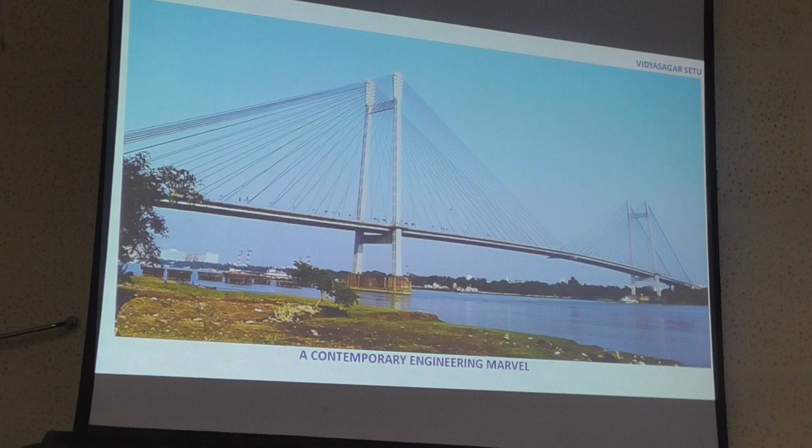Today we look at this bridge. It's a work of art. It looks like a stringed instrument ready for people to come from heaven and play music. And every time we look at this structure, anybody who had been involved with this bridge will always feel very happy and very, very passionate about it.

Now, coming to a little history, I find many of the people here, there is a mixture of young and old, and I am sure those who are my generation or after will love to remember how this project came up, what was the development, why it took so much time, and how did this develop.

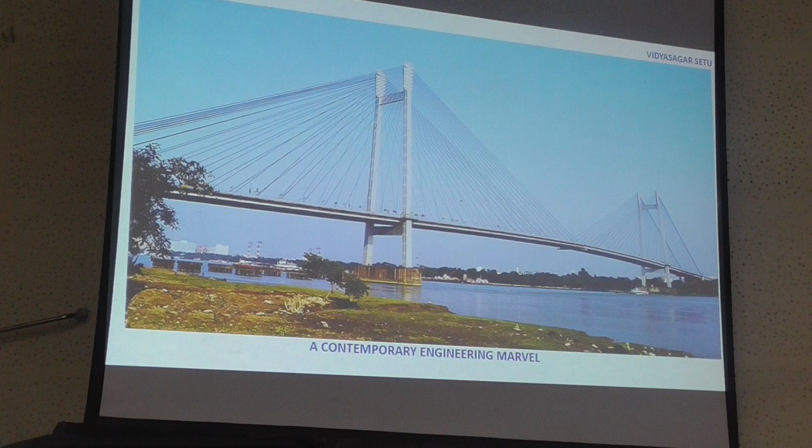You see, Calcutta is a gift of River Hooghly. Kolkata would never have come if River Hooghly was not there. River Hooghly had been the preferred trading route for entire Europe. The ladies of Europe used to long for Bengal textile, and almost all European countries had sent their vessels to Bengal for not only taking sarees but textile and many other objects.

It was a passage navigable for those ships of those days which required less draft. It was navigable right up to Triveni, and most of the European countries sent their ships up to Triveni, and that area used to be the trading point. All the suppliers would come there, and that is why, when this Jubilee Bridge was constructed, it had been kept with a lot of clearance so that ships could move up to there.

But the British were always different. They decided to make the port or make their trading hub. It was not a port, it was just a trading hub.

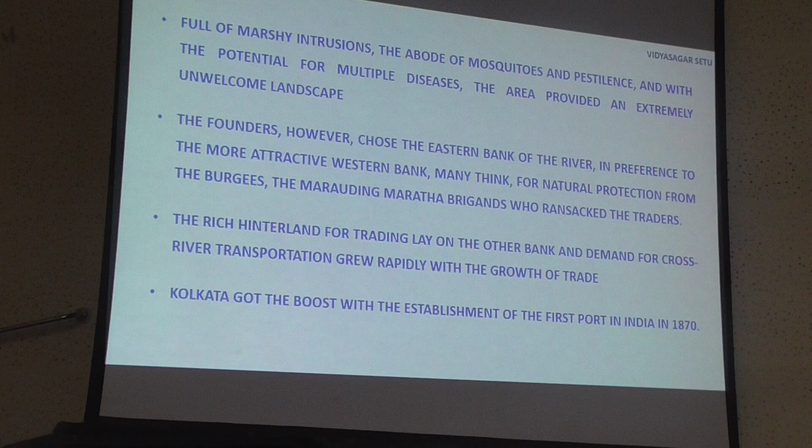You know, they made their trading hub in Calcutta, near Kolkata. They had the foresight that ships are becoming heavier and the draft would not be there. So they decided to locate there, though the area was marshy, full of mosquitoes and pestilence. It was a difficult area to live and one of the most challenging places to make a new settlement.

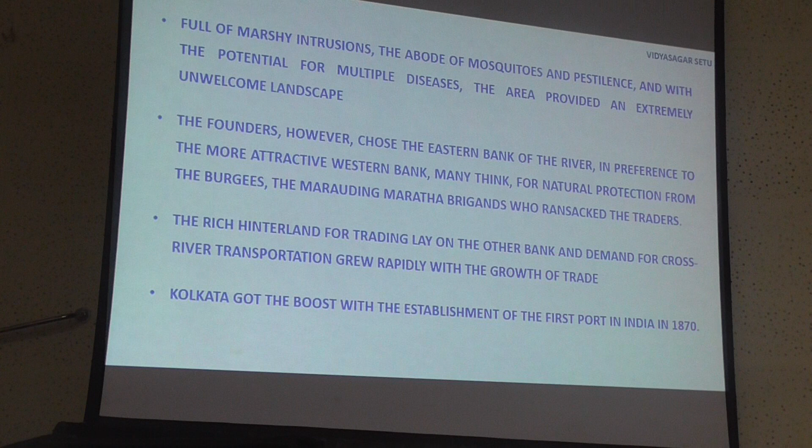It had always been a query amongst people why the British chose the eastern side of the river instead of the western side, which was much more approachable, easily communicable, at higher altitude, and drainage was never a problem. They chose the eastern side, many suspect, because they were scared of the Burgees. The Marathas used to come all the way.

You know, we had all heard the verse, Borgi Elo Deshe. And the British also made the Maratha ditch on the north to protect the city from Burgees. So it could be that, or it could be some other thinking, but the founders decided to make this the trading hub. Initially ships used to come and exchange their trading materials.

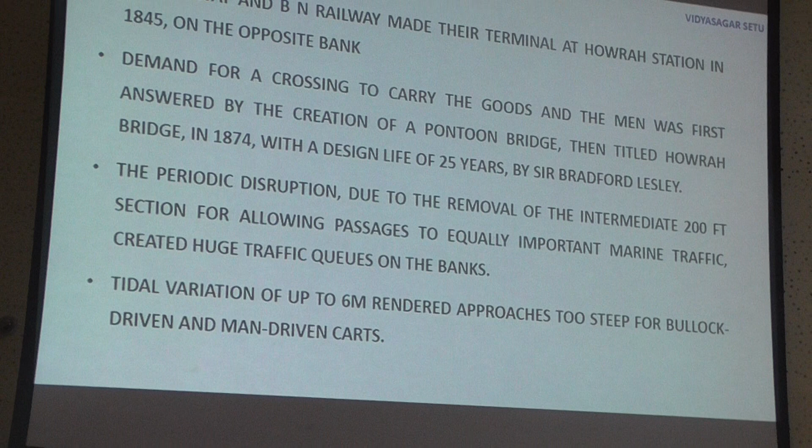Now, Calcutta incidentally had become the first port in the country. It was in 1870 that the port was formed in Calcutta. The port trust law was passed for setting up a port at Calcutta. The two railways, East Bengal Railway and Bengal Nagpur Railway, made their terminal at Howrah Station in 1845. Now, that is on the other bank. The port is on this bank, on the Calcutta bank.

Automatically, all the cargo and the men who used to come for this port had to cross the river. And the demand for a regular crossing became very loud. The first solution came in the form of a pontoon bridge. An illustrious engineer, Sir Bradford Lesley, who was also responsible for the development of Sir R.N. Mukherjee as an engineer, was given the charge, and he was also responsible for the Jubilee Bridge near Bandel, Naihati.

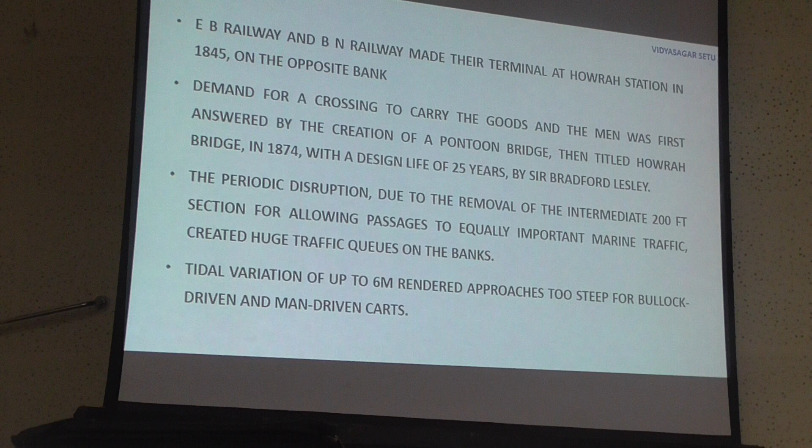After that, he was given the charge of this pontoon bridge, and he was very fond of pontoon bridges per se. This is a bridge which was designed and constructed by him in 1874 with a design life of 25 years, expecting that by 1899 there would be another bridge coming up. That pontoon bridge unfortunately had to continue till 1943. So the pontoon bridge had a life of 70 years, even though it was thought that it would be there for only 25 years.

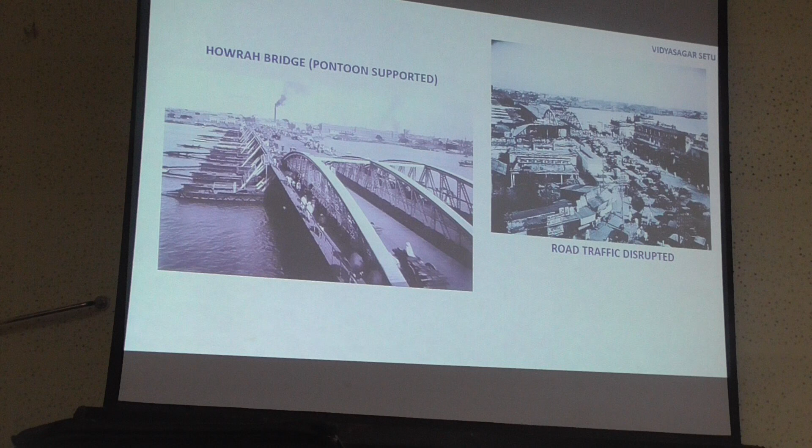So demand for a permanent land crossing grew. It was understood that it is not possible to have an interim crossing. It affects both the road vehicles and the river crafts. Both are affected, and the answer came quite late in 1943 as the new Howrah Bridge. Incidentally, the pontoon bridge was known as the Howrah Bridge. So when this new bridge was constructed, the act was passed as the New Howrah Bridge Act, and this was known as the New Howrah Bridge.

Now this was again an outstanding structure in those days, with a span of 1500 feet or 450 meters. It was unusually long for those days, and therefore a very considerable time was taken in formulating the bridge arrangement and the design, and it was a bridge which required 26,500 tons of steel. Very proudly, Tata's supplied 23,000 tons of this as a matter of national pride.

And this was the first use of high tensile steel. The other steel is known as mild steel because it had a value of 250. Now this was 350. And this is the first bridge in the world which has used high tensile steel.

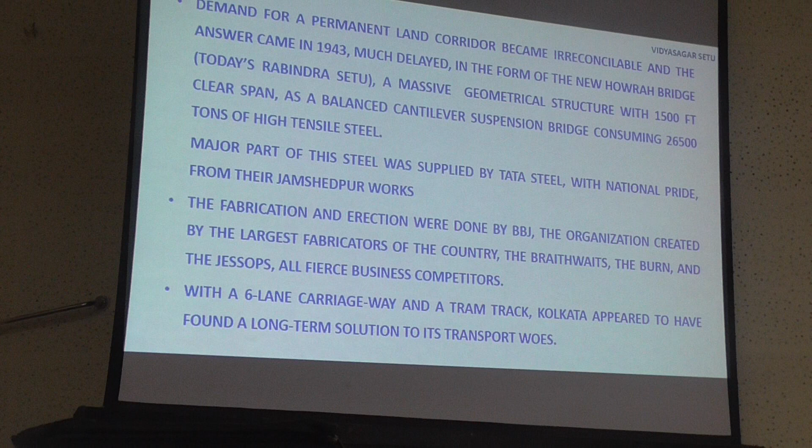The fabrication and erection were done by a local company, BBJ, though all British owned. Braithwaite's, Burn and Jessops, all three are British owned fabricators, the topmost fabricators of the country, fierce competitors. But when this bridge proposal came, they did not want to let this go without their participation. That's why they formed a consortium, a company with the name of BBJ, and they fabricated and were also given the charge of erection. Even though the original contractor remained Cleveland Bridge from England, the entire thing as part of the contract had to be subcontracted to BBJ.

So with a 6-lane carriageway and a tram track, Calcutta got a new bridge with a 100 feet wide deck, and the city fathers thought that their transport problem was solved for a very, very long time.

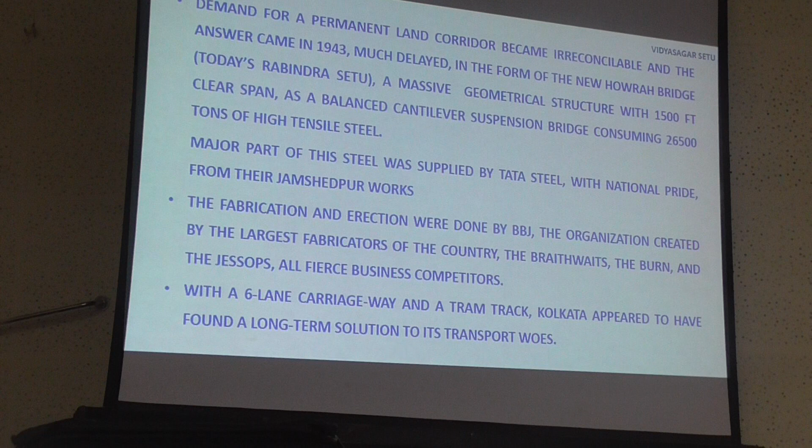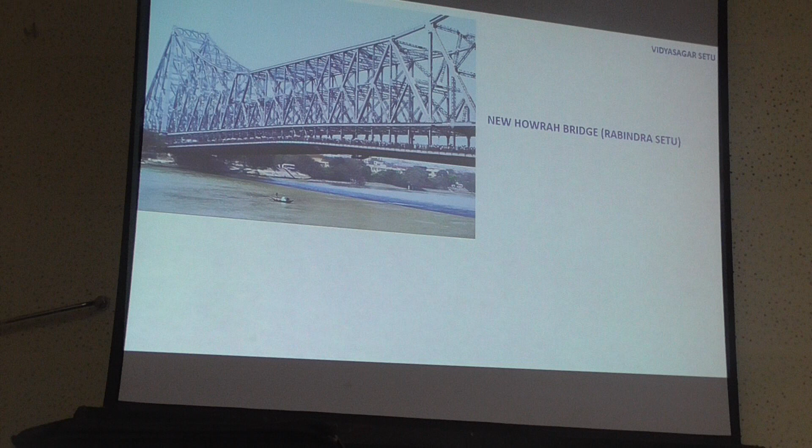Next. The new bridge was completed in February 1943. It was in fact completed in 1942, but the political climate was hostile. The British did not have the courage to inaugurate this bridge in '42 because of the movements going on, and this was delayed and inaugurated in 1943 with a single tram crossing the bridge at midnight. That is how the inauguration was done.

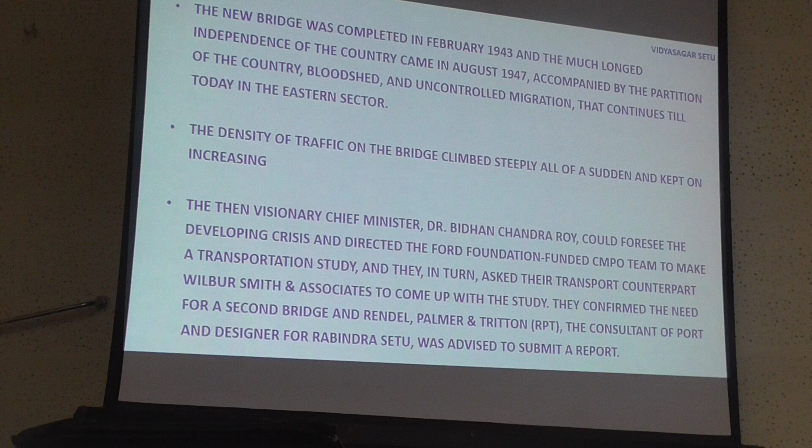But then came partition, then came our independence, much longed-for independence, but followed with bloodshed, migration, which unfortunately is still continuing today. We still have people coming from the other part, which became East Pakistan and then Bangladesh. The density of the bridge almost doubled, all of a sudden. And by 1960, it was difficult to cross that bridge without giving a lot of time. When we were in BE College, it was part of our regular travel, and it used to take some time to cross.

The then Chief Minister, the only visionary Chief Minister we had, Dr. Bidhan Chandra Roy, foresaw the problem, and he asked CMPO, which was working with Ford Foundation money, to look for an alternative crossing. CMPO contacted their transport consultant, Wilbur Smith and Associates of USA, who immediately opined that a bridge is necessary, and they entrusted Rendel Palmer and Tritton, RPT, who were permanent consultants of Calcutta Port Trust and had also been the designers of the Rabindra Setu, the so-called New Howrah Bridge. They were entrusted to make a report after site inspection, soil investigation and traffic study.

RPT submitted its report in 1962, and they immediately confirmed the urgent need of making this bridge, and they wanted another 6-lane carriageway bridge with a capacity of 85,000 vehicles per day. And the present Vidyasagar Setu has exceeded that expectation also. The number of vehicles passing is now touching 100,000. They made a detailed study and submitted their report. The first question which came is where to locate the bridge.

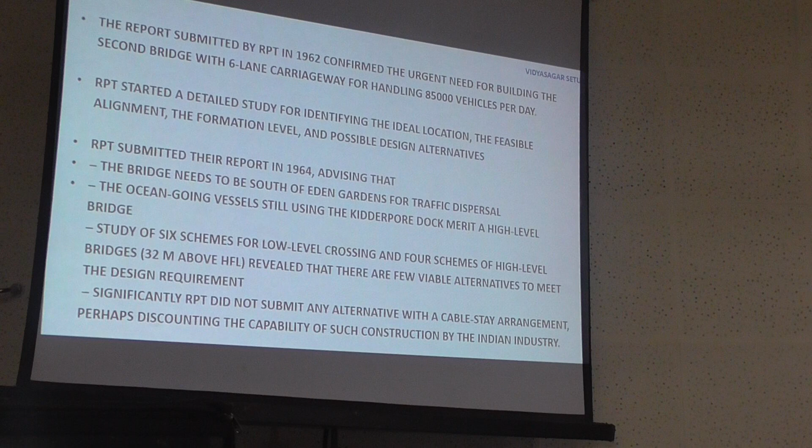Their suggestion was, or rather finding was, that it can only be done on the south of Eden Gardens, because if it is further north, then traffic cannot be dispersed. The ocean-going vessels which were still using Hooghly and using Kidderpore dock required a high-level bridge, because if the vessels pass and the bridge does not have the clearance for such vessels, it is always possible that some ship will drift and hit the bridge.

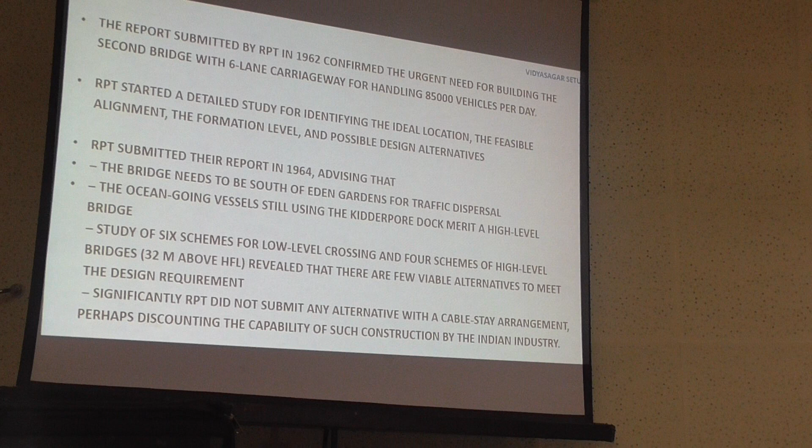All of us question, the present users of the bridge, why was it necessary to make this bridge so high and waste so much money? This was the necessity because there had been an accident in Maracaibo where a ship hit a bridge and the bridge had been dislodged, and therefore it was decided that it will be a high-level bridge. Then they submitted 6 low-level schemes and 4 high-level schemes for consideration by the authorities.

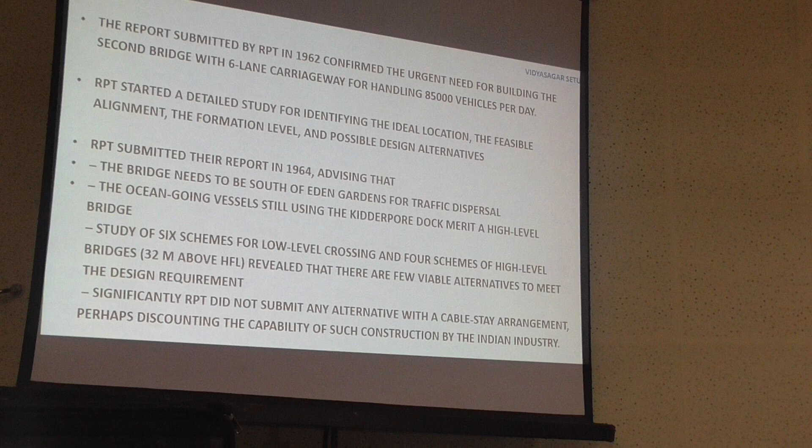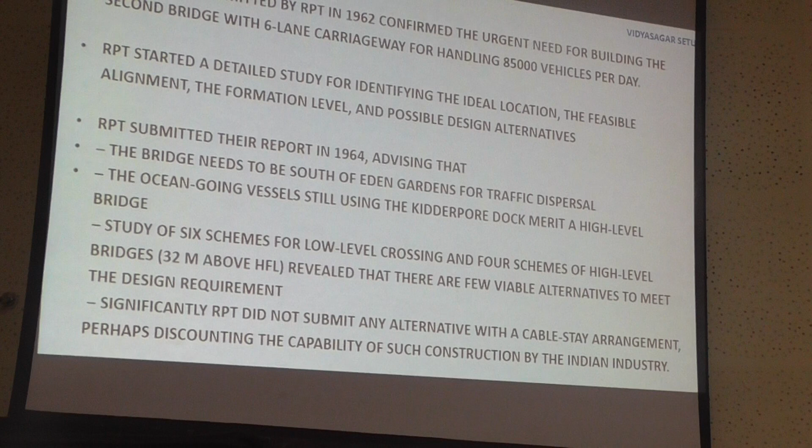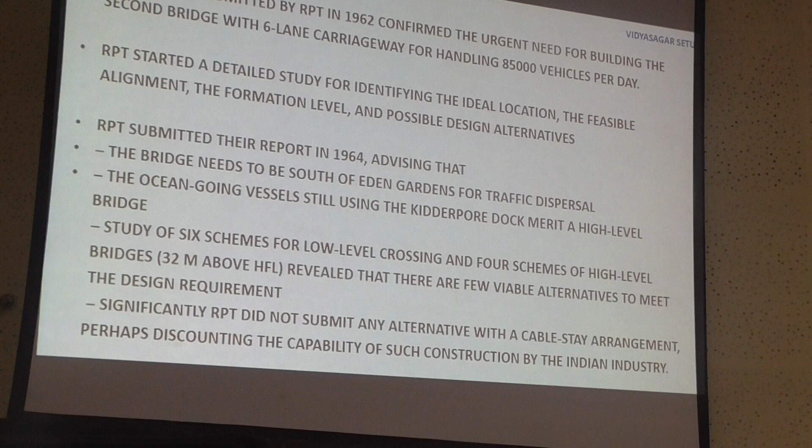Authorities were, of course, the Port Trust, because the bridge is on Hooghly and Hooghly belongs to Port Trust. That is why Port Trust was the authority all the time for the bridges on Hooghly. Now, all these alternatives of RPT were different design considerations. There were self-anchored suspension bridges also, and long span box girders. But RPT did not recommend or suggest or even consider a cable stayed bridge, which was new on the horizon of the bridge industry. Perhaps RPT thought that Indian industry would not be able to make a cable stayed bridge successfully.

So as a result, the state government at that time got serious. They initiated a hydraulic model testing of the location from CWPRS in Pune to find out whether locating the piers as they are suggesting, because they are suggesting one pier to be inside the river, and how that is going to affect the Kidderpore dock and the river, the hydrology of the river, the siltation pattern, which was always in doubt. Their report was available in 65. They cleared the location of the bridge with certain changes in docking the ships in Kidderpore and also some shapes of the piers. Now, after these studies, clearance was given to the Port Trust to go ahead with the tendering process.

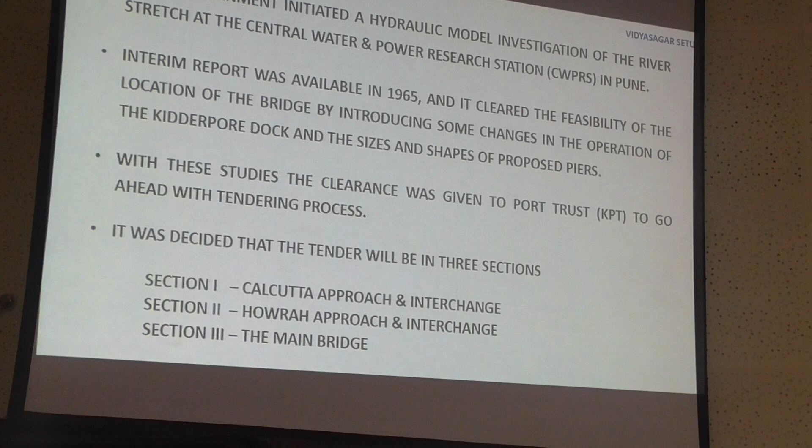It was agreed that the tender, this being a large project, will be in 3 parts. There are 2 approaches and the main bridge. It is the main bridge which was a very attractive proposition for the international construction industry at that time, because such an unusual long span bridge was not much in the horizon. The world was passing through a recession. The OPEC had unleashed a tremendous attack on the financial stability of the world, and India was of course in a very, very bad state. Indian economy was in a poor state, but the bridge could not wait, and tender was invited.

It was a global tender with provision for foreign exchange, but it was clearly mentioned that quantum of foreign exchange will be one of the major criteria for selection of the bidder. It so happened there were only 2 bids received, not only for the main bridge but also for the approaches. There was nobody from outside, and these 2 bids were from India. One was by BBCC, which is BBJ and Gammon, and the other was EPI, which was just formed for taking the Indian construction industry to the Middle East and Arab countries in a big way, and that is why all major central government agencies participated together for making this EPI.

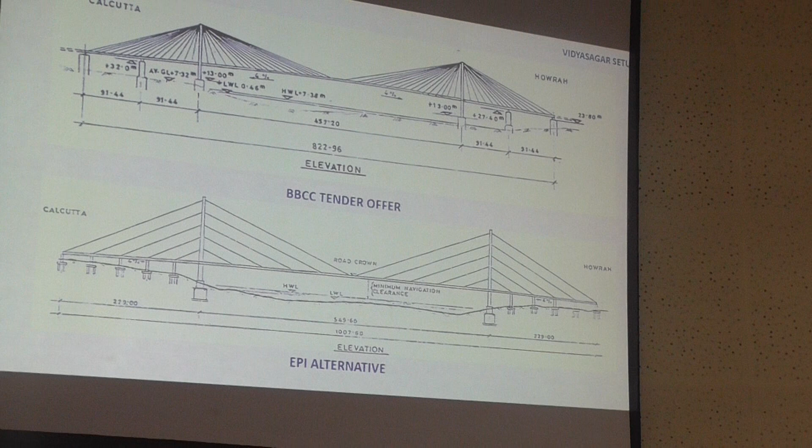So the bid which came from BBCC, you can see on the top, had a 457 meter span, as was the tender condition. It showed 1 pier in water, and of course 2 side spans of 91 meters each, and it had a fan type. Fan type means it's like an umbrella arrangement of cables. The EPI offer was also incidentally cable stayed, but they followed a 550 meter span, almost 100 meters more, and the bridge itself was almost 200 meters longer.

It was more than 1,000 meters, more than a kilometer total bridge. But it had a harp type of arrangement for cables, where the cables are all parallel. It looks like a harp.

Now both of these, as you can see, were aesthetically very attractive, and both parties were extremely keen to land this contract. BBJ, because it had very few bridges at that time, with the country's economy in a poor state, this is one bridge which could make them live. It was a live or die situation for them.

For EPI, this was a passport to enter the Middle East. If they can do a bridge of this size and importance, then automatically they will have a credential which is big enough. And it was indirectly also a fight between the state and the center, which we are so accustomed to. The central government agencies were all supporting EPI, and through them EPI was trying to get support from the central ministries as well.

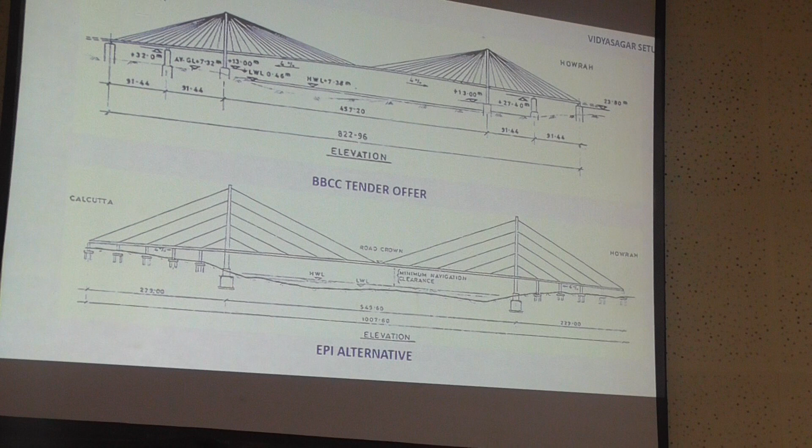And it was a fierce fight. There were technical issues as also there were political and social issues.

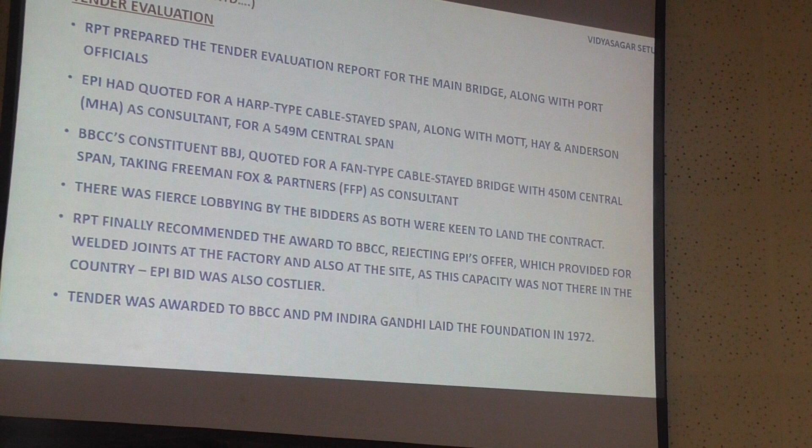RPT was given the task of evaluating the two tenders. After very close scrutiny, they came to the conclusion that the BBCC tender is a better one, in the sense it has been done with riveted construction, whereas EPI, who had Tribeni Structures as their component and Voestalpine of Austria as their partner, had suggested welded construction, welded joints. Now, welding quality level was not acceptable in the country at that time.

And there was tremendous difference between the members of the technical committee of BBCC, and that was aided by another event which I will tell you later.

But the fight came to a point where RPT's recommendation was challenged. Then it was referred to railways, because railway has more experience in steel bridges, to determine which design is acceptable. The railway chairman, railway board, appointed a committee which gave a clear direction that at this point of time, welded bridges cannot be done, and therefore riveted design is preferable, and that is how BBCC got this contract.

There was a tunnel offer. DCL was involved with that offer as a consultant, but it was an incomplete offer with no firm pricing, and therefore it was rejected. EPI's tender, incidentally, because of the longer length and all that, was costlier also. So that also helped.

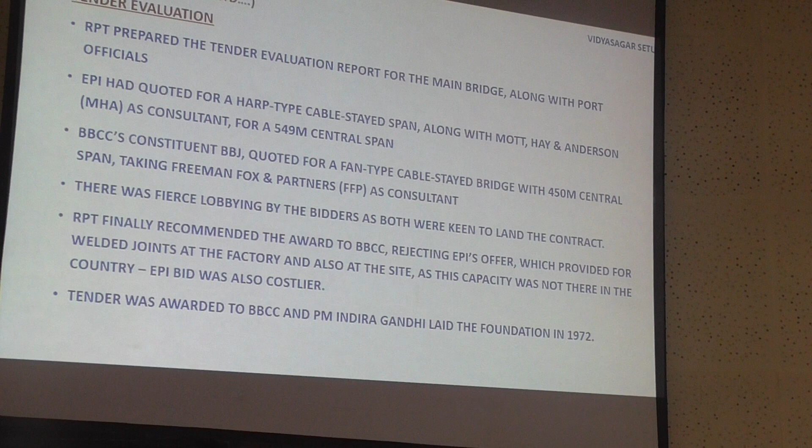Now, after the job was awarded, there were still debates going on, because all over the world, a number of long-span bridges have failed - in Europe, in Australia, in America. And these failures unfortunately got associated with cable-stayed bridges, because some of these were having a cable-stayed span also.

The failures actually happened with box girder construction. Instead of an I-girder, instead of a plate girder, at that time the box girder had come in, and everybody was trying to make the weight less, and make the plate thinner. These are all welded box girders. Now, in this process of economy, to achieve greater economy, the Lakshman Rekha was crossed, the design aspect was ignored, and one by one box girders failed.

And one of the very major disasters happened in Australia, in Melbourne. The bridge across River Yarra is still known as one of the biggest failures in the bridge industry, and a lot of people lost their lives because the bridge fell on the canteen when people were having their lunch.

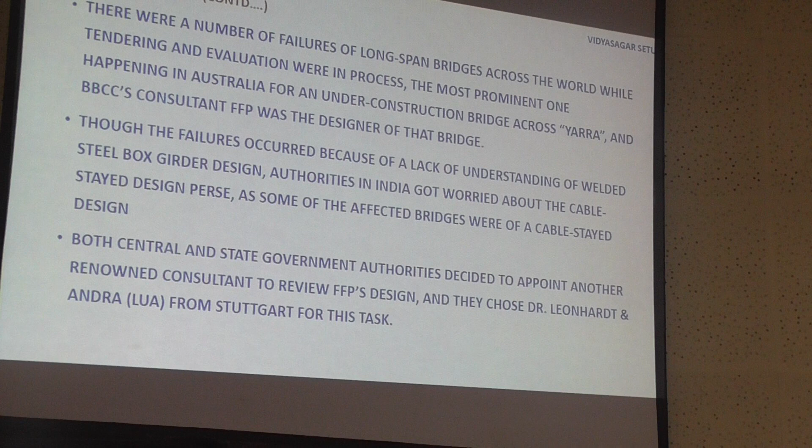It so happened, Freeman Fox and Partners was the designer of this bridge. So the opposition was very vigorous, saying how can we leave this bridge of ours in the hands of people whose bridge has failed. So after a lot of debate, a solution was found: let us have another consultant, another renowned consultant who will check the design before it is accepted. And the choice fell on Leonhardt and Andra from Germany.

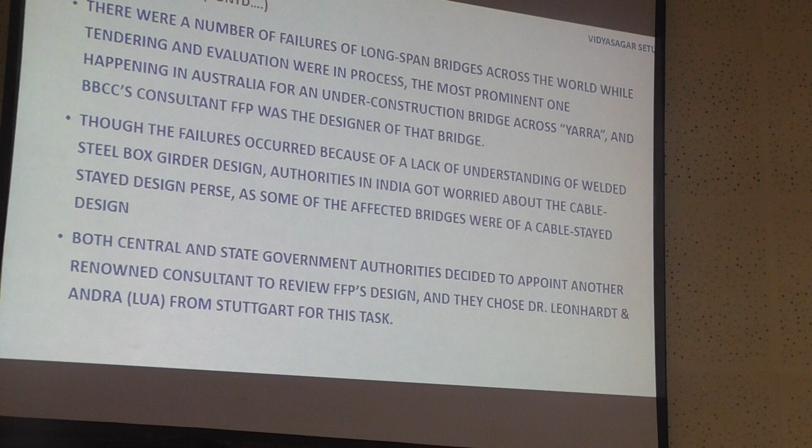Now, Lua, Freeman Fox, it so happened, accepted. They were already in the defensive because of the failure of the Yarra Bridge.

Am I taking too much time? Shall I? I find Dada leaving, so that's why I was wondering. Now,

So Leonhardt and Andra started checking the design submitted by Freeman Fox. They made some changes, which I will show on the drawing. But they wanted the side spans changed - originally two spans of 180 meters divided into 2 into 91 meters. They wanted a single span. Then, for the cable which was formed with parallel strands, they thought it better to have parallel cable. Incidentally, the same consultant is today working on the restoration and rehabilitation of the Vidyasagar Setu, and now they are suggesting we should go back to parallel strand rather than parallel cable.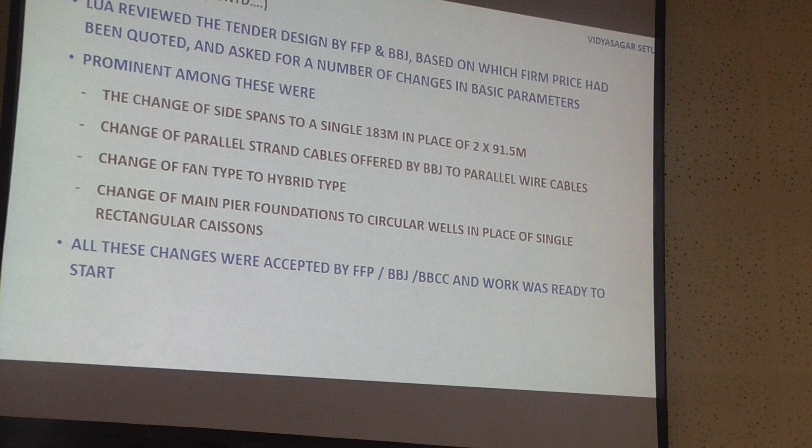Then they wanted the fan type changed to hybrid, a mix of harp and fan. They also suggested changes to the foundations - Freeman Fox had designed the foundation in the pattern of the Howrah Bridge, which has 21 chambers, 3 into 7, about 84 feet by 7 into 30, about 180-200 feet - one foundation with 21 boxes, forming the caisson. Freeman Fox suggested a rectangular caisson of similar nature but smaller, while Lua suggested circular caissons with walls inside. BBCC and Gammon found this attractive, so it was accepted. All these changes were accepted.

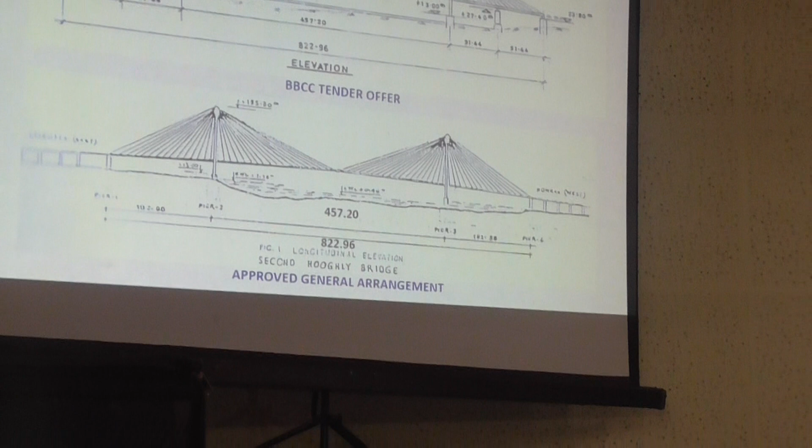Next one, please. You see, this was the tendered project on top, and this is the revised bridge we have today. You can see the side spans are larger, the cable arrangement is different, the top of the tower configuration is different. Of course, other changes aren't visible in the drawing, but everybody accepted - Freeman Fox, BBCC, HRBC - and it was thought we had clearance for the bridge to start. But no,

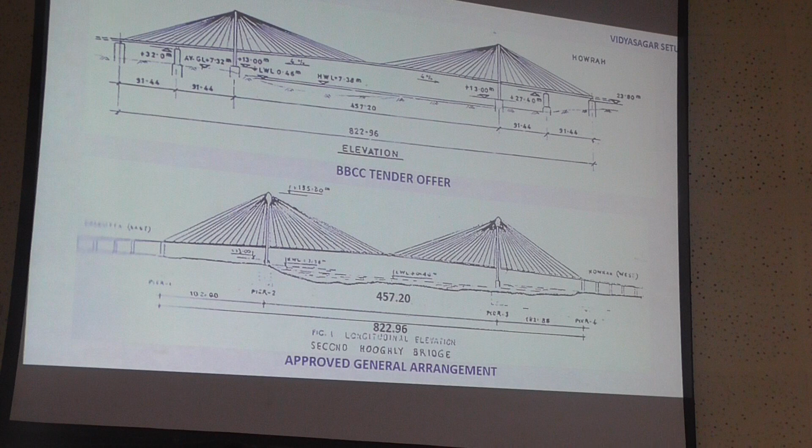Lua now came forward with another suggestion. They insisted that the RC deck, the concrete deck, should be made composite with the steelwork in the deck, whereas Freeman Fox's design also showed composite deck, but only for the cross girder and stringer with the deck. Lua wanted the entire deck to be composite as erection progressed, so each section, once cast, would set for 28 days before the next section was cast, so the dead load would also be resisted by the previous section. This was not acceptable to Freeman Fox. Their argument was that you're depending on the behavior of the deck after only 28 days, when the concrete is still not matured, and characteristics like modular ratio or strength change with weather and environment. So one cannot depend on this value with certainty, risking mistakes in the stressing of the cables.

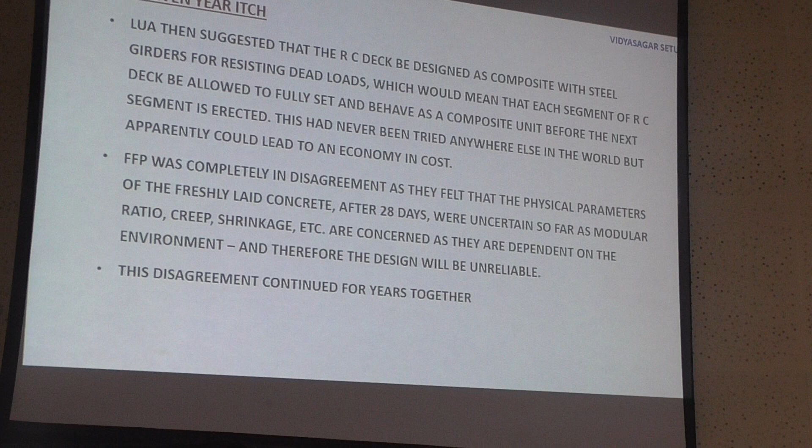This argument went on for more than 6 years. The disagreement was insoluble and reached a completely unacceptable point, and very sadly, an engineering decision had to be taken through political maneuvering. The decision was taken by the Ministry of Transport in central government and the Chief Minister of Bengal, that they would reverse the role of the consultants. Lua would become the design consultant for the contractor, and Freeman Fox would become the checking consultant reporting to HRBC. It was a last-ditch, last-minute decision, and fortunately, the consultants and contractors, everyone being tired and worried the bridge would never come, agreed. All parties accepted this arrangement - without, of course, thinking through all the implications.

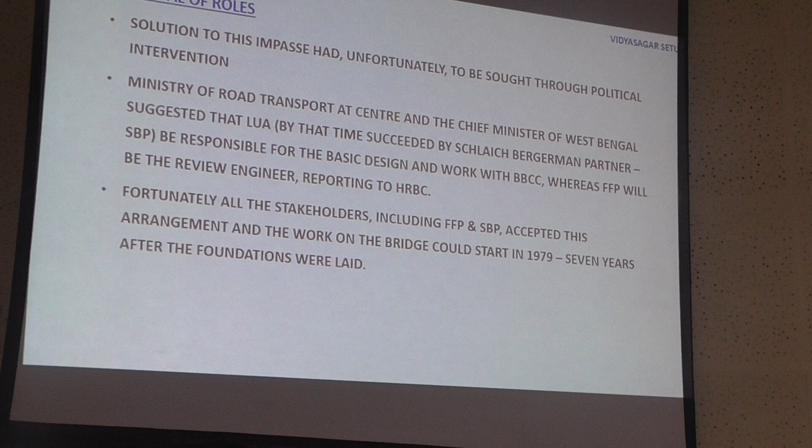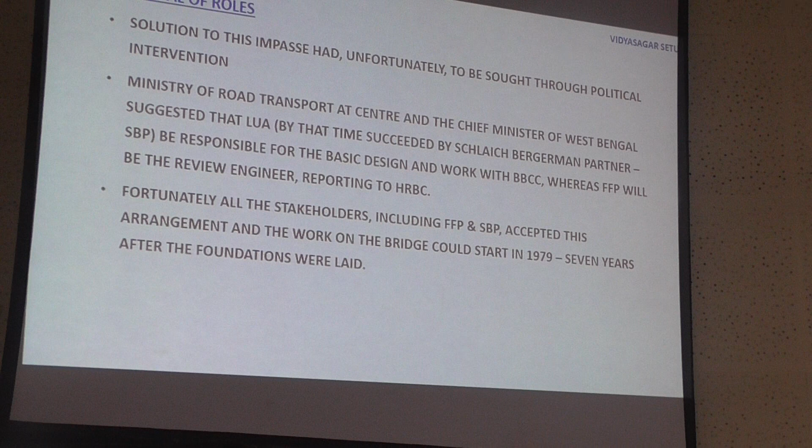The tender was a lump sum EPC tender - engineering, procurement and construction. BBJ had given a firm price based on their design, and if you change the design, the price automatically becomes undependable and is no longer acceptable per the contract. Even so, it was agreed, and this is where the excellent attitude of the West Bengal government, or rather HRBC, came in. They wanted the bridge to continue, and took a long-term decision that we should try to adjust, with pricing done in parallel. A separate section was created so the work could go on, and the contractors could get prices through negotiation, after explaining why the changes occurred and how the quantification was accepted.

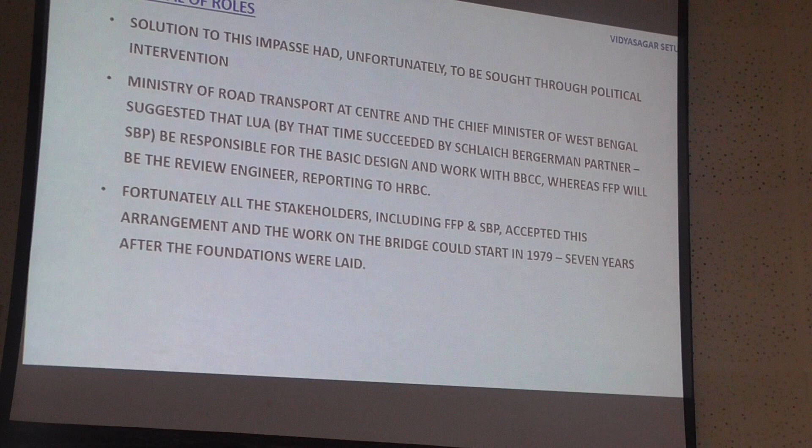The end pier is called Pier 1. The second pier, the tower on the bank of the river, is called Pier 2. Then there is Pier 3, which is inside water. And Pier 4 is on the Howrah bank. I will keep referring to them as P1, P2, P3, P4 and will not identify the exact location further. Kindly remember, Pier P1 is near Prinsep Ghat and Pier P4 is near Nabanna.

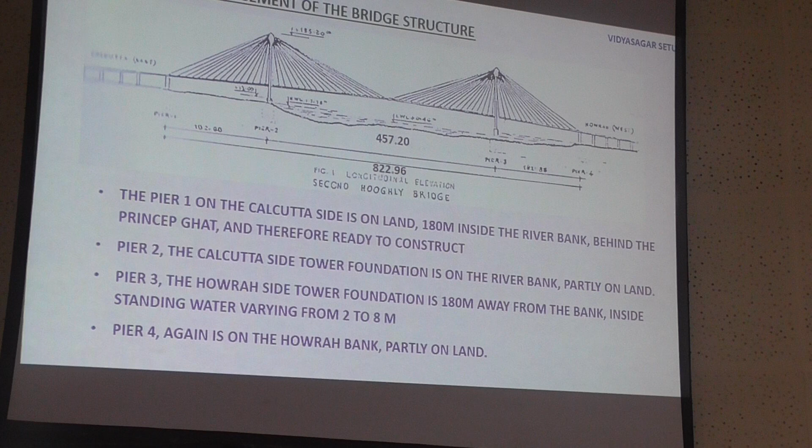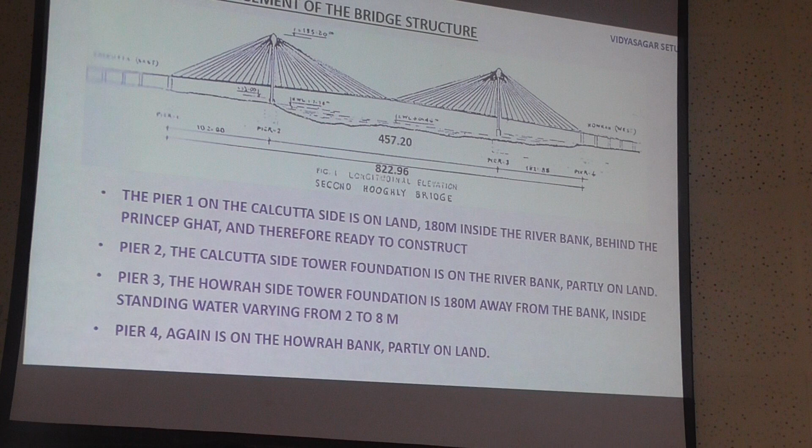These are the locations. Pier P1 is on the Calcutta side, on land, and therefore can be easily sunk by normal process. Pier P2 is also on the river bank, partly on land. But it is Pier P3 which is in water, and the water level keeps varying by 6 meters with the tide, changing 4 times a day and through the months, with neap tide and high tide. Pier P4 was also on the Howrah bank, and therefore comparatively easy to handle.

As far as the bridge is concerned, in the vertical profile, in the elevation, the mandatory clearance from the high flood level was 32 meters, more than 100 feet, enough to ensure unhindered passage of ocean-going vessels, which had reduced in number because ships were becoming bigger. Up to 16,000 ton displacement ships could be handled in the Hooghly, and ships were gradually becoming 100,000 ton or even 200,000 ton.

The gradient on the deck was 4%. Normally we give 1 in 30, but here 1 in 25 was allowed, and that automatically stopped all movement of non-motorized vehicles - no rickshaws, no hand carts or things like that. The Howrah Bridge was designed considering bullock carts, but this one was designed considering the elimination of non-motorized vehicles.

The height of the tower is about 100 meters from the road deck. The cables are rigidly held on the deck girders, connected to them, and on the tower at the top there is a special section called the flower, inside which there was place for stressing the cables and for accommodating the cable.

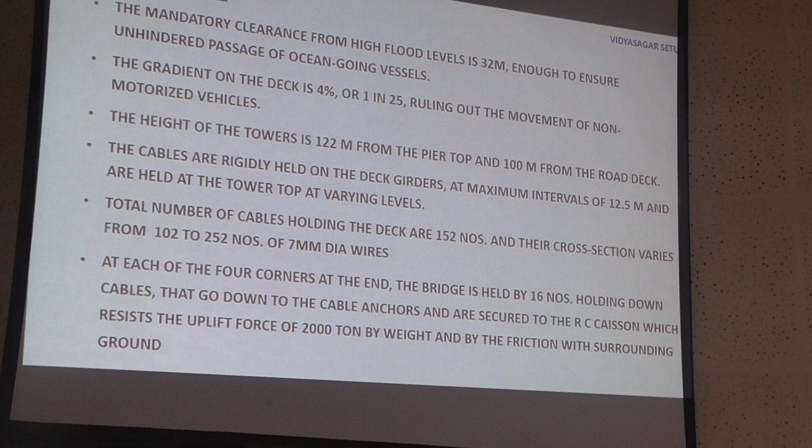The number of cables holding the deck was 152, and their cross section varied depending on the force in the cable, because the ones closest to the tower were taking less tension, and the ones on the other side were taking more tension. At each of the 4 corners at the end, the bridge was being held. At every corner there were 4 holding down cables, vertically holding down, keeping the bridge in position, because with unsymmetrical loading the bridge has a chance of lifting up. So total 16 such cables were there.

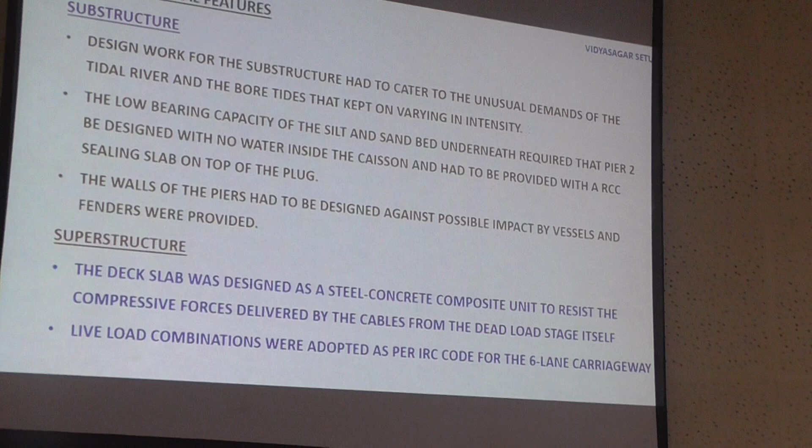Now the special features of this bridge as far as substructure is concerned. It is a tidal river, very different from a normal river, where even if levels fall, there is a calendar pattern. But here, 4 times a day, high tide comes and low tide comes, so the level keeps varying. Then there is the tidal bore. All BE college students know what a tidal bore is, at least the earlier ones knew what force it would bring and how much loose material would come with the tidal bore and hit the foundations.

The walls of the piers had to be designed against impact by vessels. There could be vessels gone astray and hit the pier, and therefore you had to design the wall for resisting that. You have to provide fenders also.

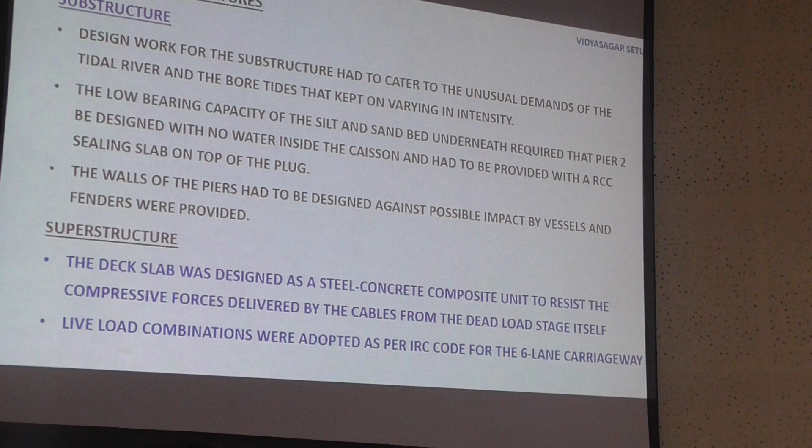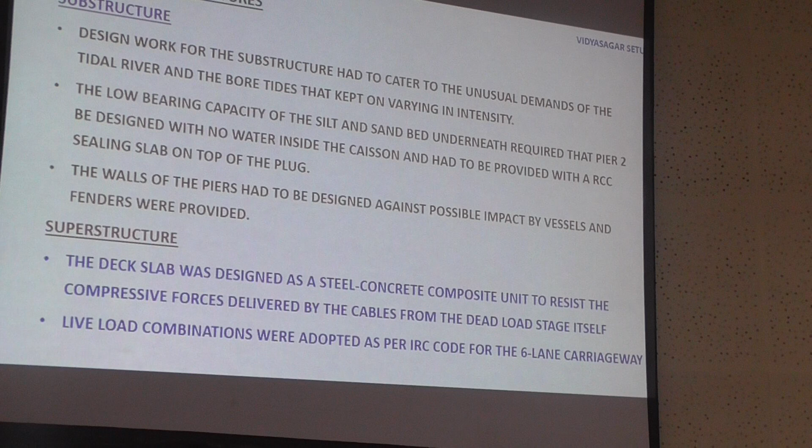The superstructure, the deck slab, as mentioned, has been designed as a steel-concrete composite unit to resist the compressive force delivered by the cables from the dead load stage itself, whatever the designer had wanted. And incidentally, before the actual work started, Dr. Leonard...